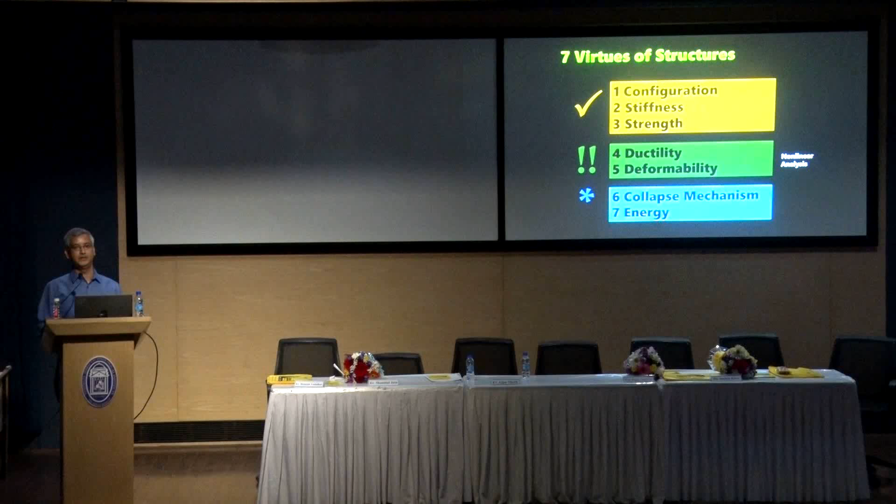But to say that yes, this structure is able to achieve that goal of strong column, weak beam, is the collapse mechanism that we assess the structure with, doing some kind of analysis. The next stage would be to see what is the energy dissipation capacity of the structure, so this serves that purpose.

So when we have earthquakes, we have column structure and we have wall structure. We know, through experience, through analysis, through a lot of design that people have done, that walls are able to sustain larger deformation. Columns will be able to take higher load, but walls will be able to take higher load as well as a lot of deformation capacity.

That's why we are trying to push, or the earthquake codes that are coming in the country now are trying to push towards wall construction rather than just moment resisting frame with columns and beams, particularly to achieve the deformation capacity which will be based on the ductility that we achieve in the structure.

So the minimum requirements are lateral stiffness, overall strength, and deformability. These are the 3 things that we need to do, and we are currently trying to do that. If we design as per the code, we think that we'll be able to achieve all these 3 aspects required by the code.

So with this background of earthquake behavior, analysis and design, we see what is required for earthquake safety assessment. To retrofit a structure, we need to first understand what the structure is capable of: do the assessment, some analysis, some preliminary design, and look at the configuration of the structure. Putting all that together, we come up with a plan of whether the structure is okay or not. If not okay, what is the next step to be done?

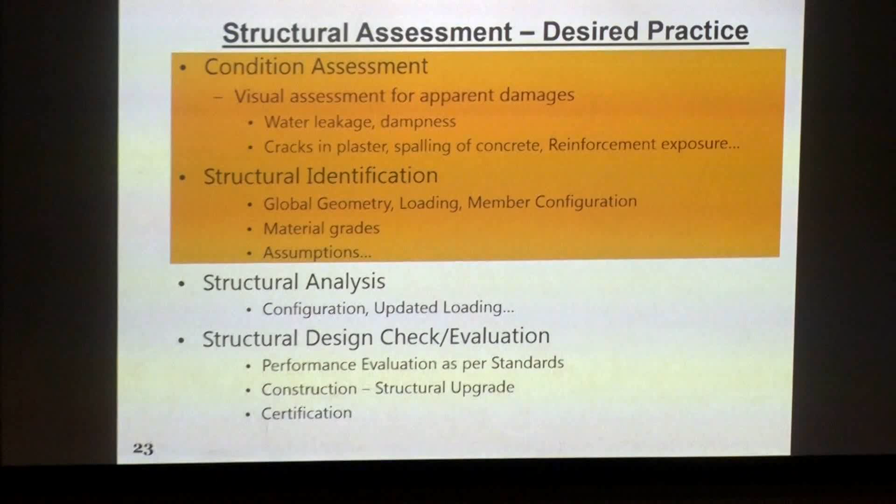A similar thing is expected here, where we do the structural analysis, structural design, structural construction, and certify that it is okay for occupation now. So that is what the desired practice should be.

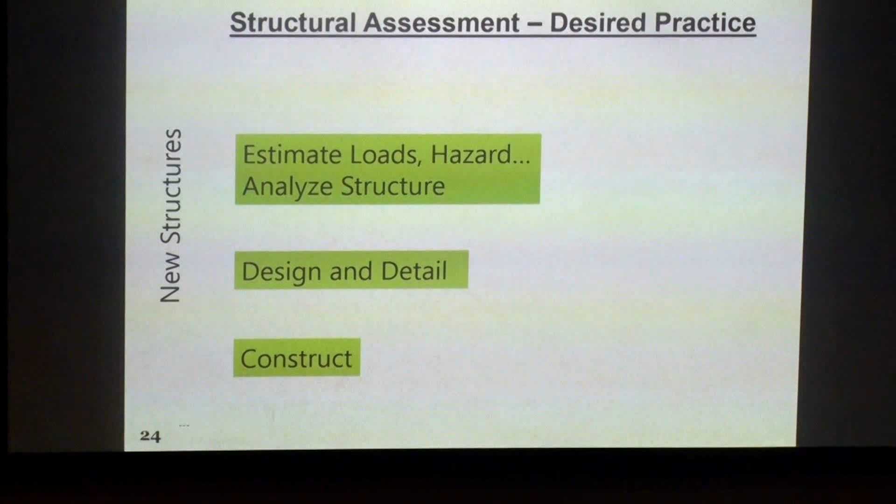So when you look at new structures, you estimate the load, analyze the structure, design in detail, and then construct. It's a top-down process, a simple process. We make all the assumptions, implement them, and achieve the structure we want.

But if you look at existing structures, we have to assess it first. We have to understand the existing condition of the structure, its existing configuration, and its capability. That comes as assessment, and then combined with analysis, we go back and evaluate for adequacy.

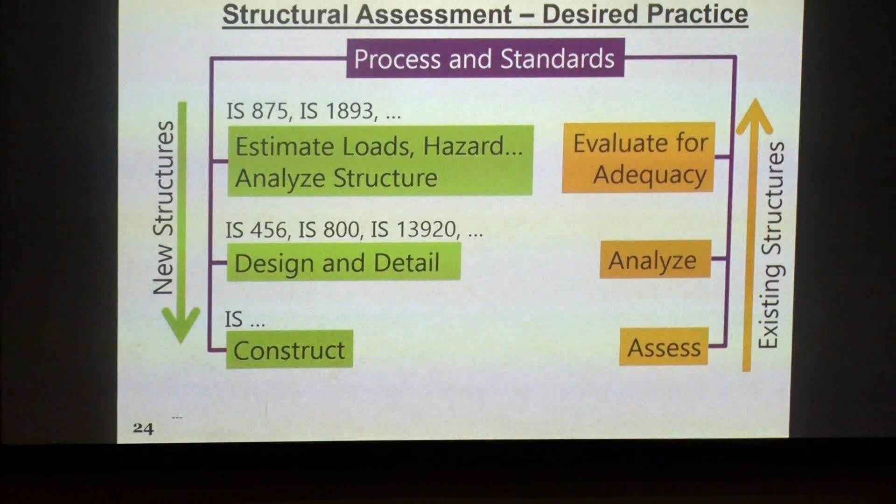We do assessment, analysis, and design, and then we evaluate whether this is adequate as per the relevant standards. That is the reverse process, where you are already given a structure and you say whether it's okay or not, and then do some kind of intervention.

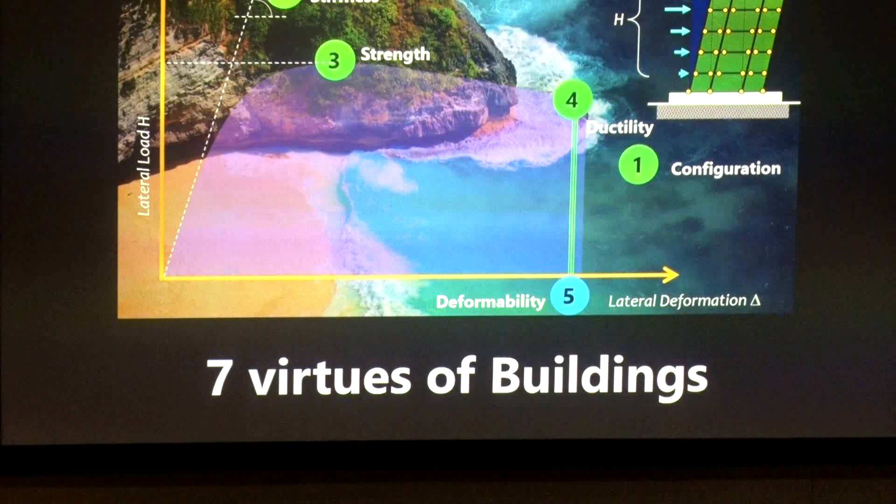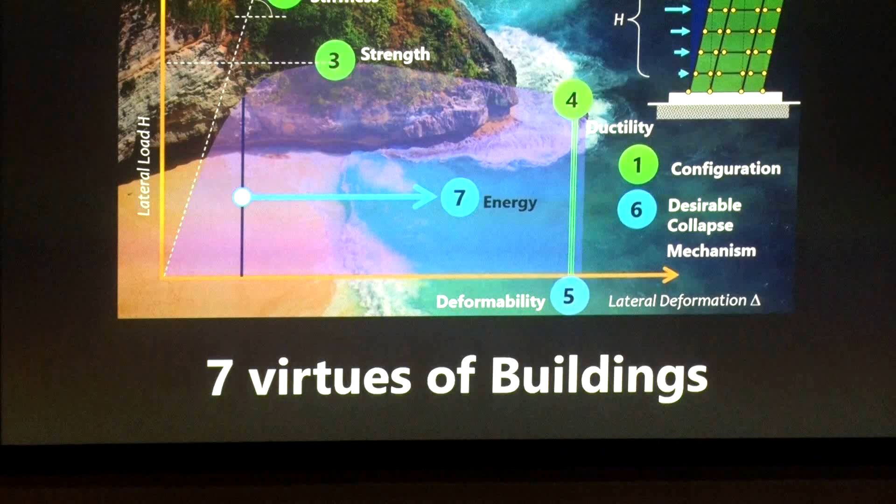Just revising this: configuration, stiffness, minimum strength, ductility which comes along with deformability, desired collapse mechanism, and energy. This was shown earlier in the morning also. I want to go through this again, because if you understand this, it will be easier to conceptualize and imagine a structure having all these features, or whether the structure has only a few of them, and how to bring these features to the structure would be easier for the structural engineer.

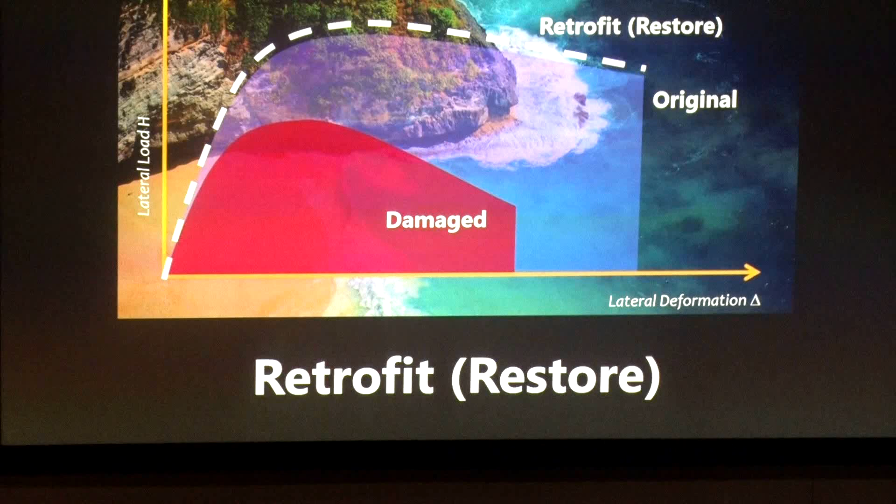But there's one small change I would like to state. We have to see how to come to that. The original structure was designed about 50-60 years ago, at that point under whatever standards existed. Now the standards have changed substantially. Whether we bring the new standards into the picture or not is the question we need to collectively answer.

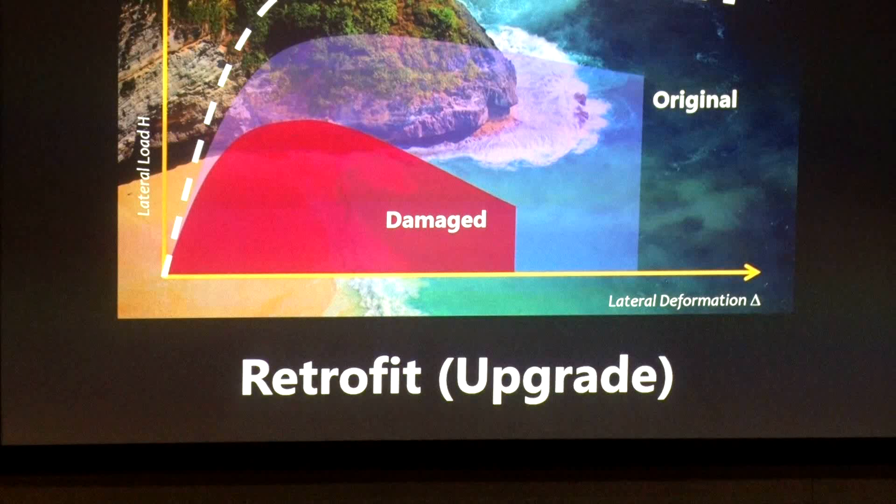Then there is remodeling: original structure, damaged structure, and the remodel will be somewhere in between. We make some changes, and based on our understanding of the behavior of the structure and the loading, we say that a slight increase we may be able to achieve.

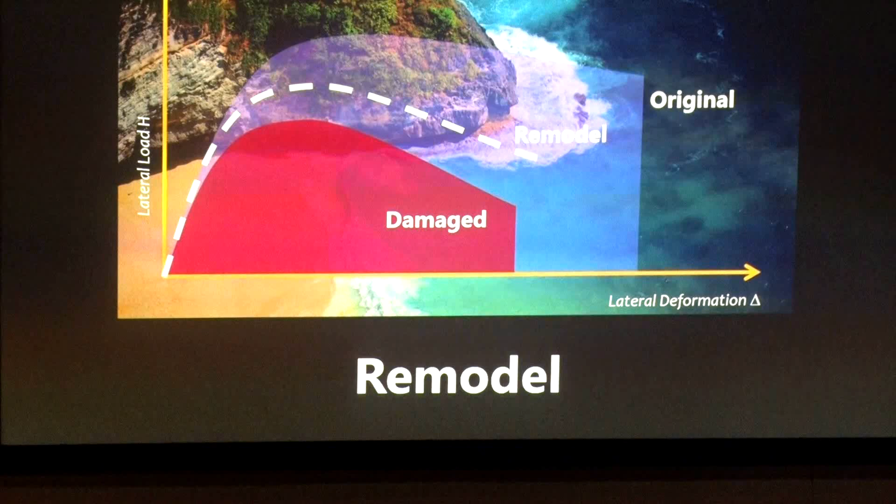We look at repair. In repair, we are actually going back to its original configuration. You achieve the damage stage - if you just take out plaster, take out cover concrete, and replace it with mortar or micro concrete, you're not going to add any value to it. You're just going to restore its damaged state. Visually you will say this is looking good, the beam is good, but you have not done the due diligence of assessing and checking whether the structure is capable of taking the expected loads or not.

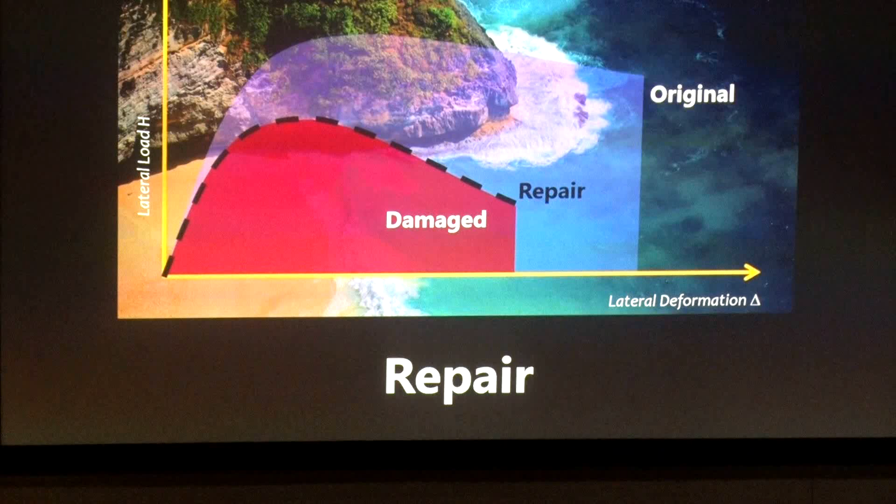So if you look at all three together - retrofit upgrade, retrofit restore, remodel, and repair - these are the levels we will achieve in terms of how the structure is going to serve us for its remaining life.

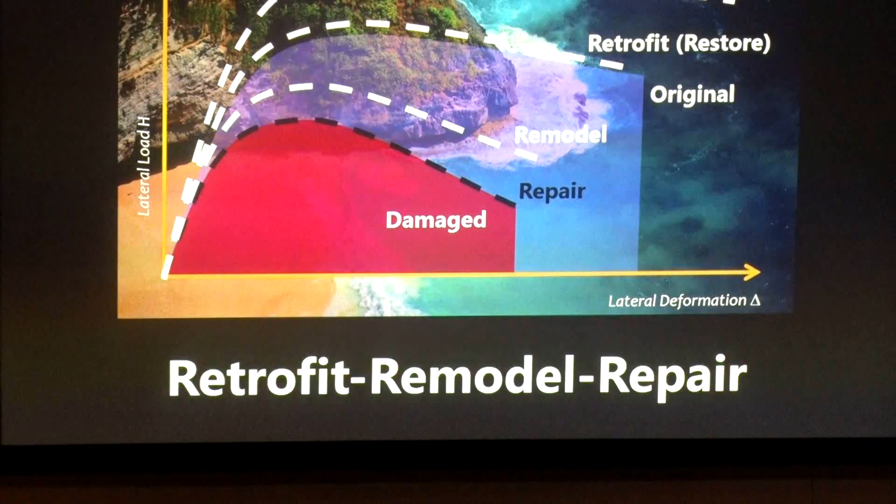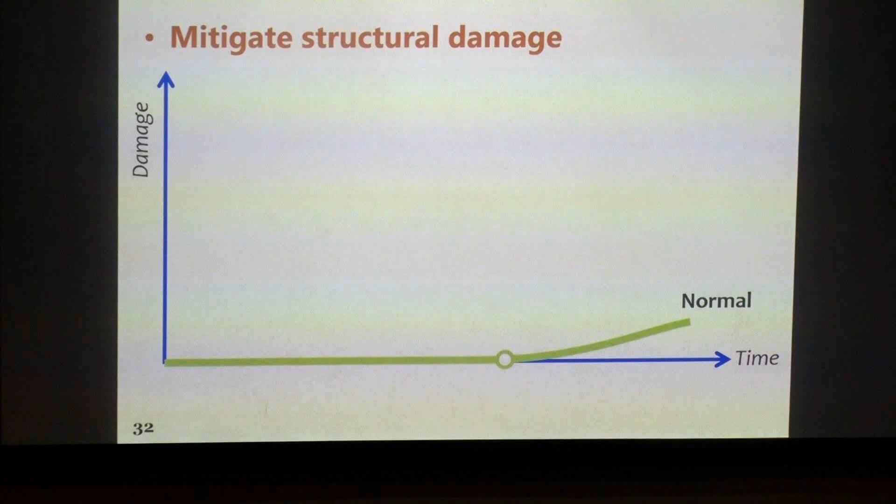So when we look at another pictorial, we're trying to put in different ways of understanding what this process of assessing and retrofit entails. This is the normal life of the structure, and if there are deteriorating characteristics imposed on the structure - sulfate attack, carbonation of concrete, some damage, bad use, leakage, corrosion - all those affect the behavior of the structure.

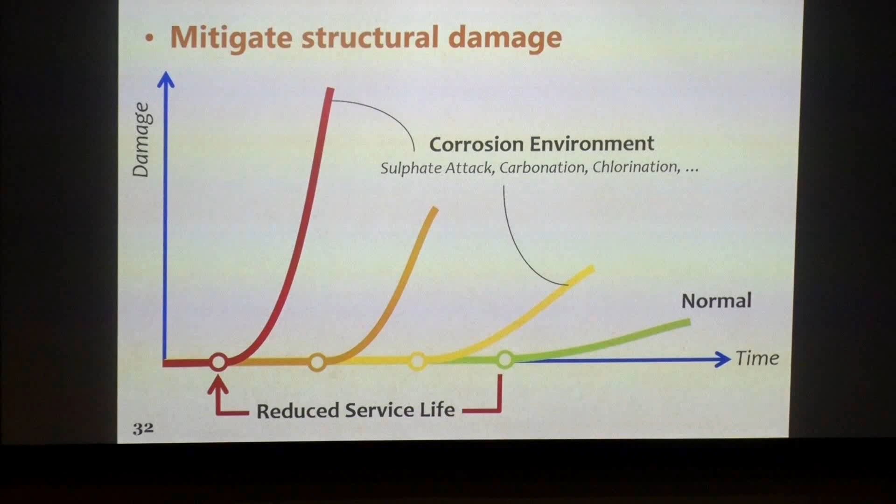So if you look at the behavior of the structure, its capacity degrades over time. If at some point in time you decide to do a restoration, retrofit, or upgrade, and you do it earlier, you may be able to extend the life of the structure by a little bit.

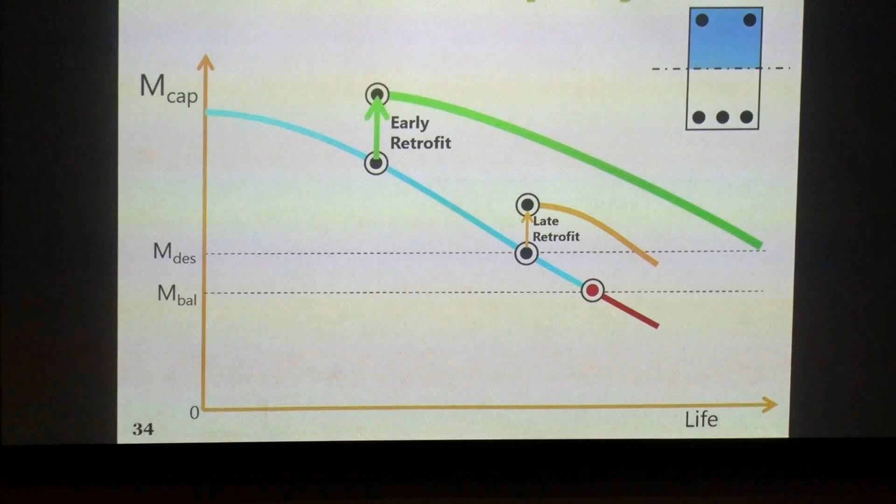If you do a late retrofit, because the structure has degraded so much, getting in all those features compounded with the new standards, we may not be able to achieve the same extension in the life of the structure. It's not that we will not be able to achieve it, but the difficulty level will be higher - the effort and money we have to spend would be much larger when we do a late retrofit.

If you do an intervention, a repair or retrofit at some point in time, you increase the life of the structure, and it is brought back to a good state where it can take sustained loads. But at a certain time, when the structure is highly degraded, going in for retrofit becomes more and more difficult.

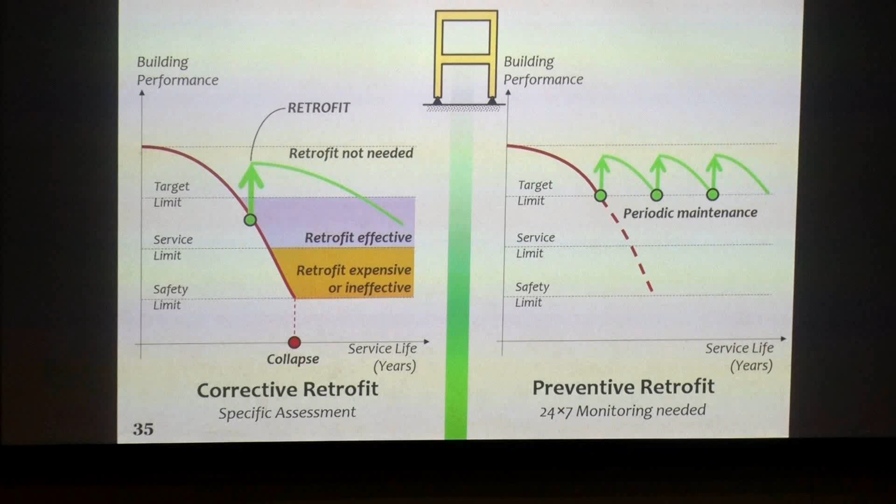Another pictorial shows how the structure behaves. If you go in for repair, you are just restoring the structure to its current level. There is no added value in terms of behavior or capacity of the structure, so there's no improvement. In case of the design load, the structure will not be able to perform the way it is supposed to.

So again, structural repair is not structural retrofit. We have to come out of the notion that just doing some kind of restoration repair amounts to a retrofit of the structure.

Right now we don't have a compiled document or guidance which tells us how to do this. The effort of BIS CED 39 is to create a document that will guide us in taking this forward, whether we are looking at restoration, upgrade, remodeling, or retrofit.

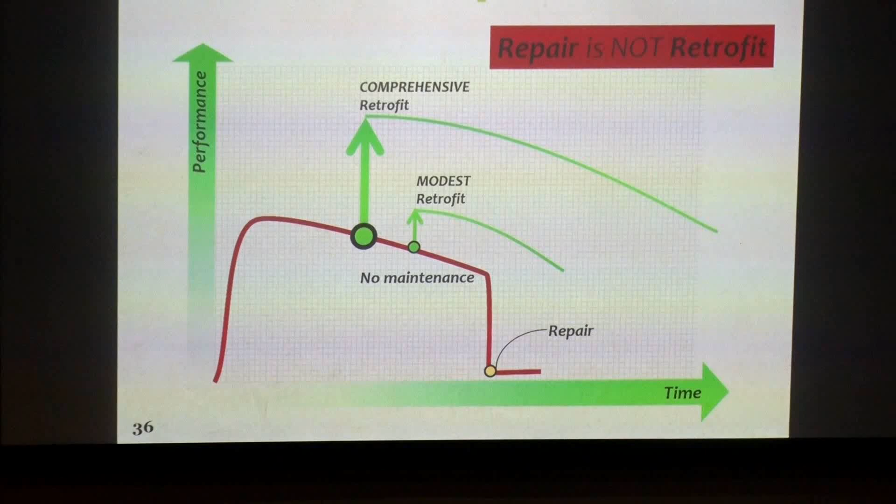Why are we doing this? Because there is some deficiency that was there originally in the structure, or something has happened where the structural capacity is degraded. Either it is environmental conditions, or change in codal provisions, or insufficient load combinations considered.

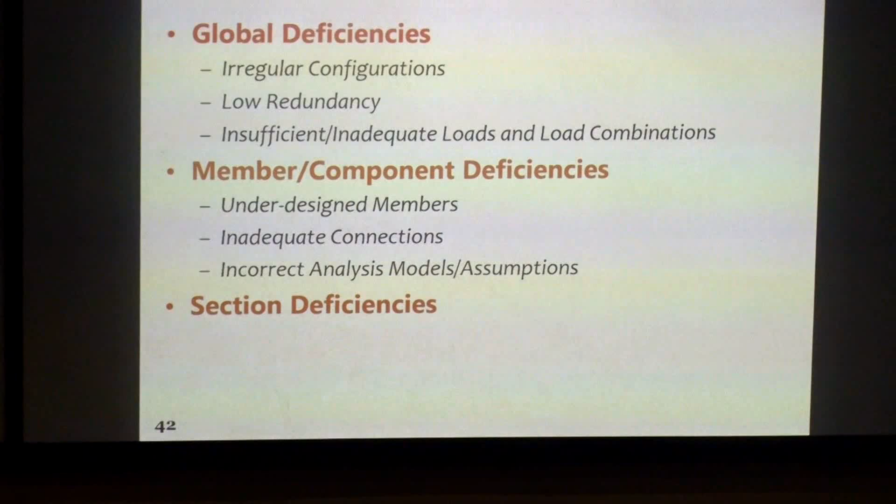So you would have under-designed the beam, or have bad connections that are not properly designed. Strong column, weak beam has not been followed, because of the way the structure behaves during earthquake shaking.

Then we have the effects of the re-entrant corner, which is very well captured in the literature on concepts of earthquake resistant behavior of buildings, a book written by C.V.R. Murty and Rupen Goswami. They have covered various configurations we should look out for, with pictorial representations of what happens with this type of structure, where because of this type of deformation, there's stress concentration at the joints or re-entrant corners.

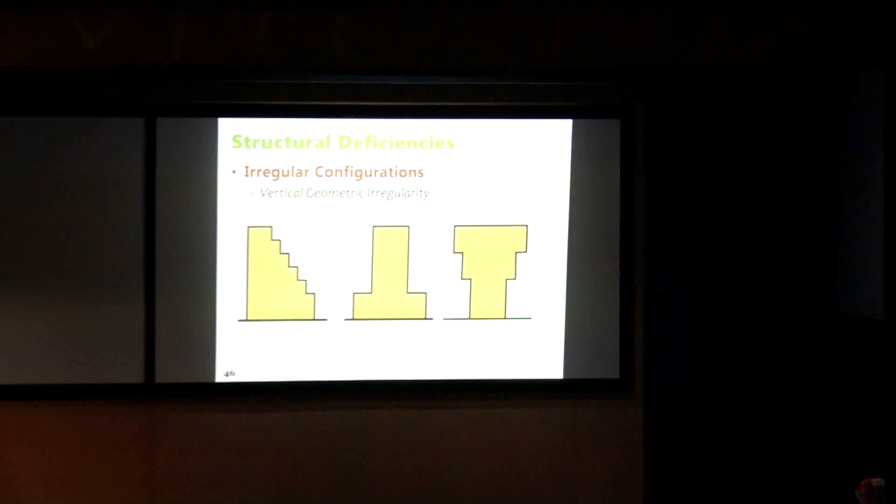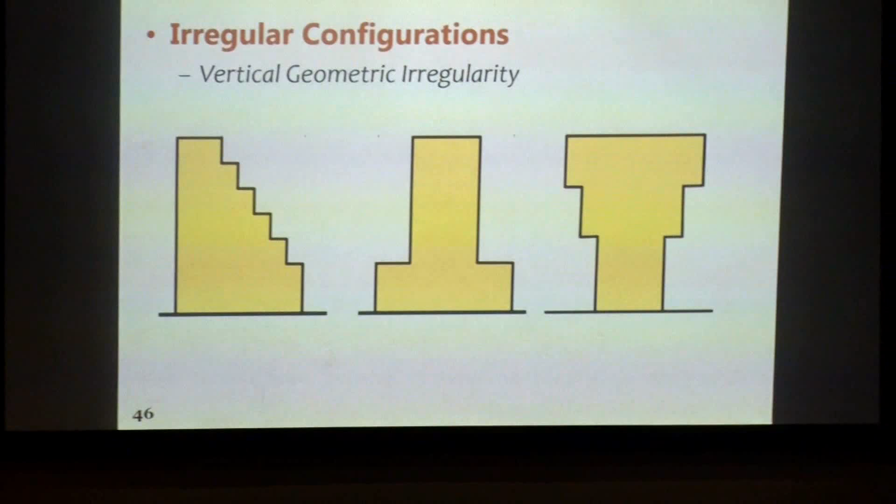Then we have irregular geometries. This is again covered in the code, and what is to be done is also given in the current draft of the code. The earlier code was talking about it very subtly, but the revised code coming out is explicitly talking about how to take care of this and how to avoid it, and at what level you have to say this is not allowed, this is prohibited.

So these are the problem points in these types of buildings. At the re-entrant corner, wherever there is a change in geometry, is basically the problem. So it's very layman type of terms, if you use them.

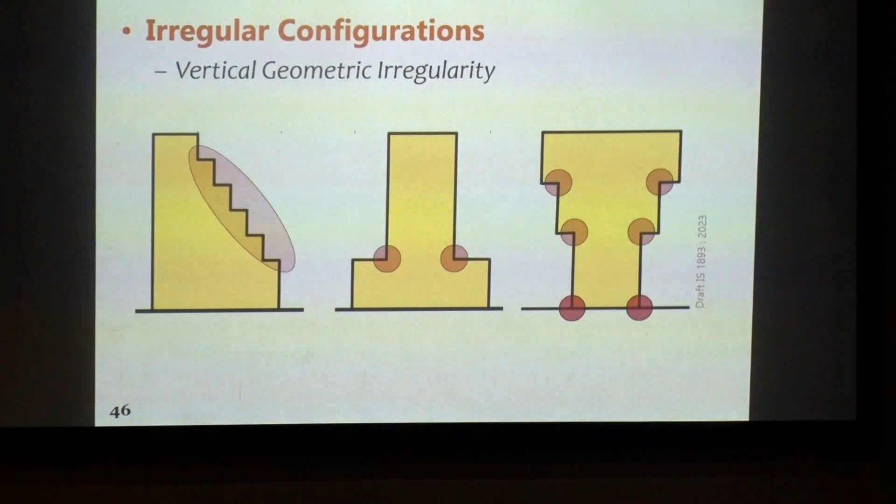Wherever there's a change in geometry or shape, you would have a problem with the re-entrant corner. This is a famous building in Bombay, the typewriter building, which is basically the stepped building that the code talks about. Another building is basically the inverted building, with 3 by 3, 9 columns at the base, and cantilevers coming out by about 7 meters. This is a typical case covered in our code.

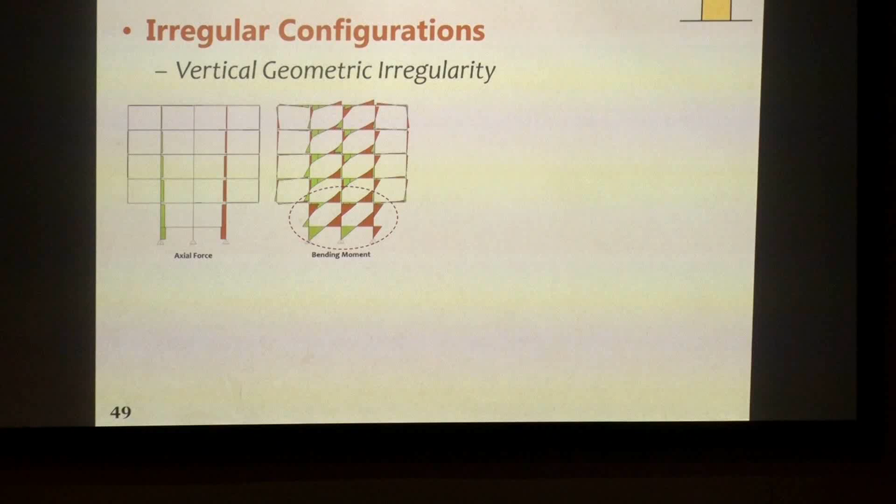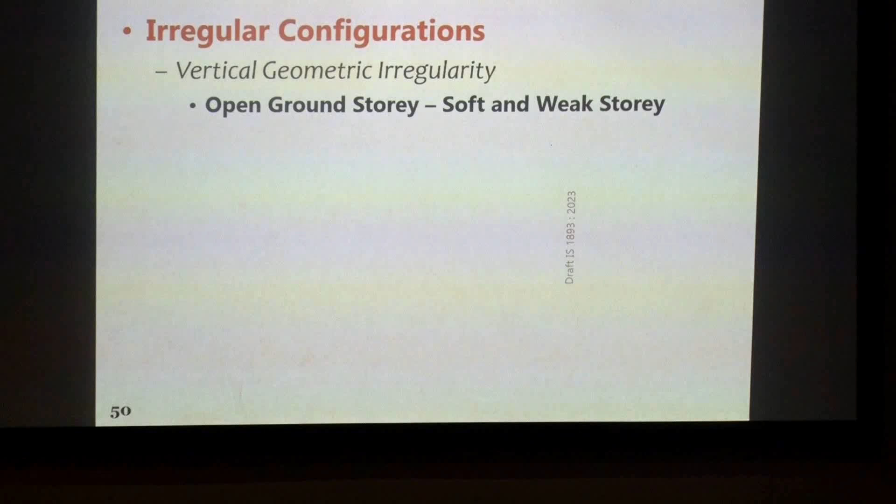So we have these irregularities. What happens when we have such a configuration, and what would be the condition of the structure if a design level earthquake strikes? This is explained in a book that is freely available on the internet. You should go through it, as it gives a lot of insight into the behavior and how to avoid such issues.

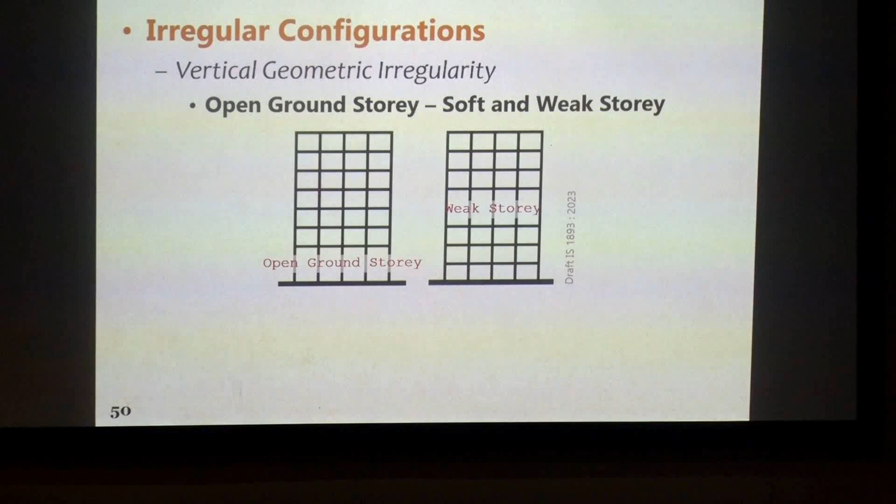Then we have open ground story, which is a traditional problem building for us across the country. We have seen this in many earthquakes, whether it's Bhuj, Chamoli, Jabalpur, or even before that in Killari. Some cases of open ground story or weak story were noticed, and we have been struggling with this problem, how to avoid it and how to make our buildings safe when these conditions exist.

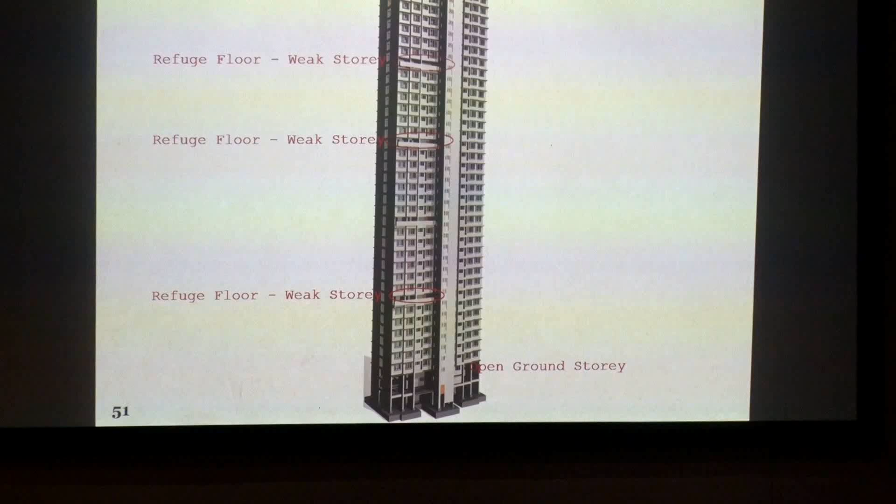In tall structures, you would have service stories, which may be a problem of weak story or open story. How to deal with them is something most structural engineers struggle with. Then we have open ground story, weak stories, and stories with infills or without infills, weak and open. These are the configurations now covered in the code.

Weak and flexible story, and reduced column sizes. It's a very common practice that as we go higher up, the load reduces, so we reduce the column size. It's a natural thing for an engineer to do, but we have to ensure drastic changes are not happening in those structures.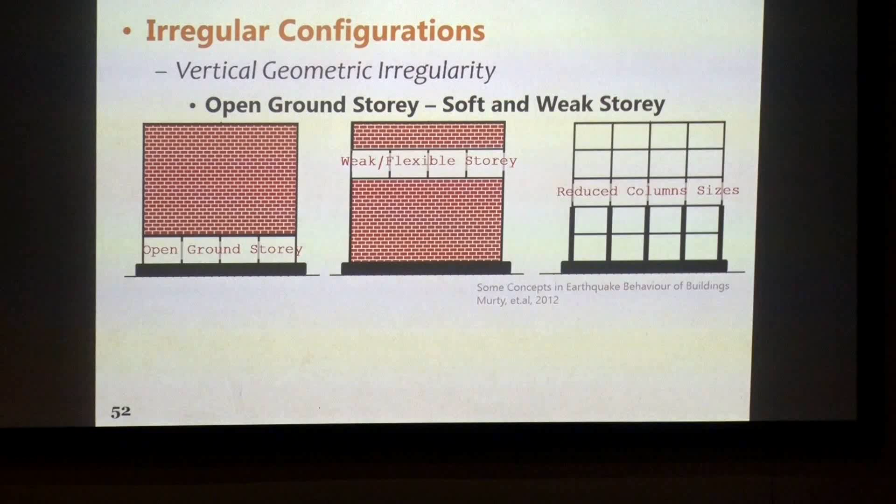This is a typical example of open ground story, because if you want to park a car, this is all parking area, and that is how the open ground story comes into the picture.

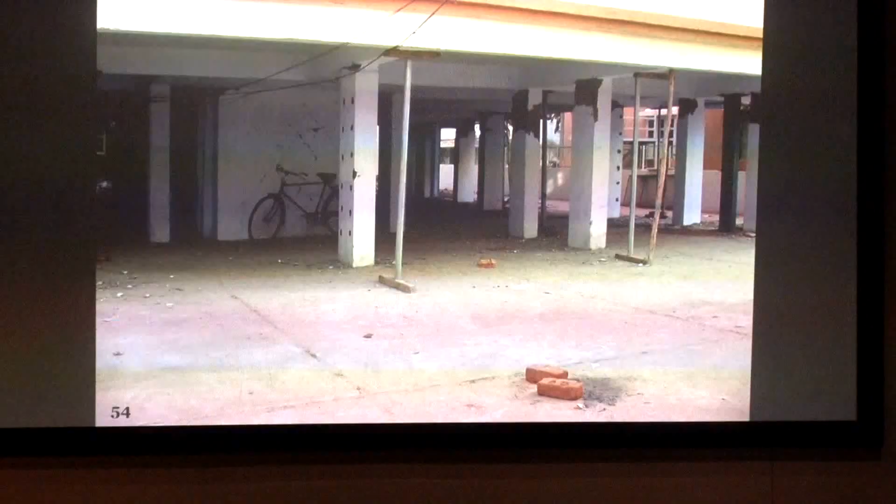This is a picture from the Jabalpur earthquake, where we noticed this for the first time. First time in India, a building with an open ground story was subject to an earthquake, and we were able to look at it and understand the behavior. Theoretical knowledge existed in India before that, but we looked at this and came up with strategies of avoiding it, or doing an intervention which would reduce the effects of open ground story.

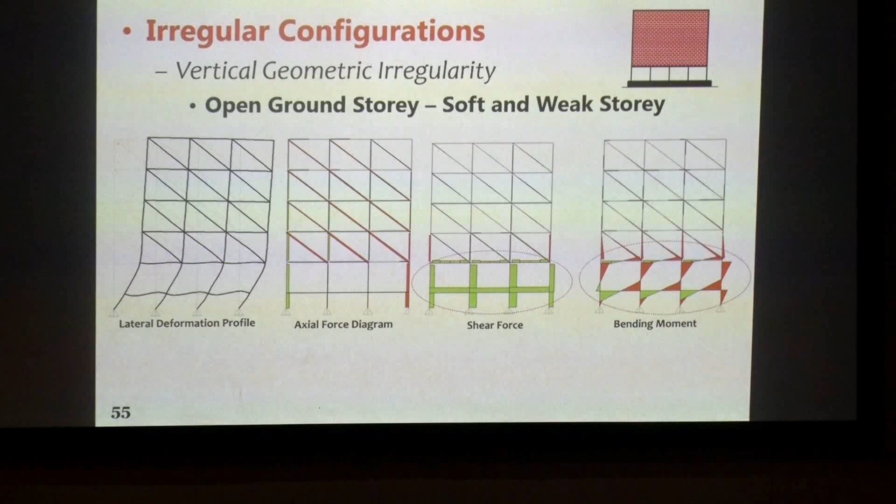So again, structural deficiencies, open ground story. The book I talked about explains the effects, and pictorially tries to show what will happen if this is the condition you have. Later in the book they also try to explain the methods you should use. This is a weak story at the upper level.

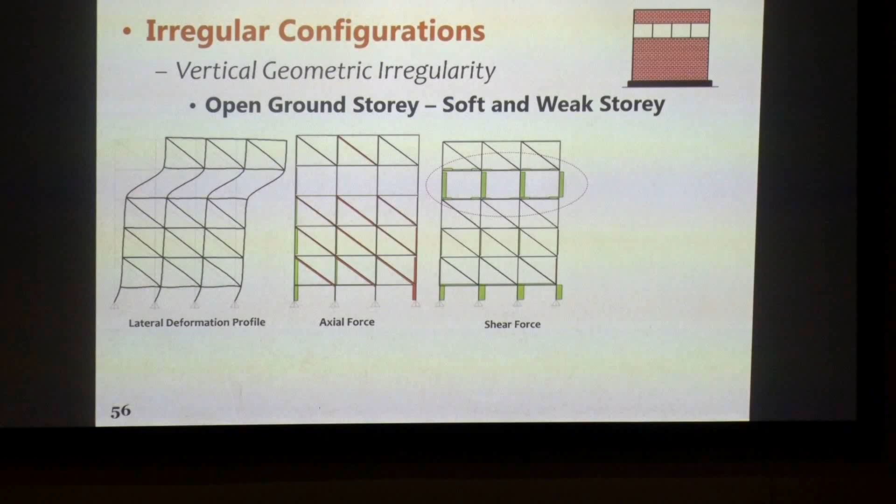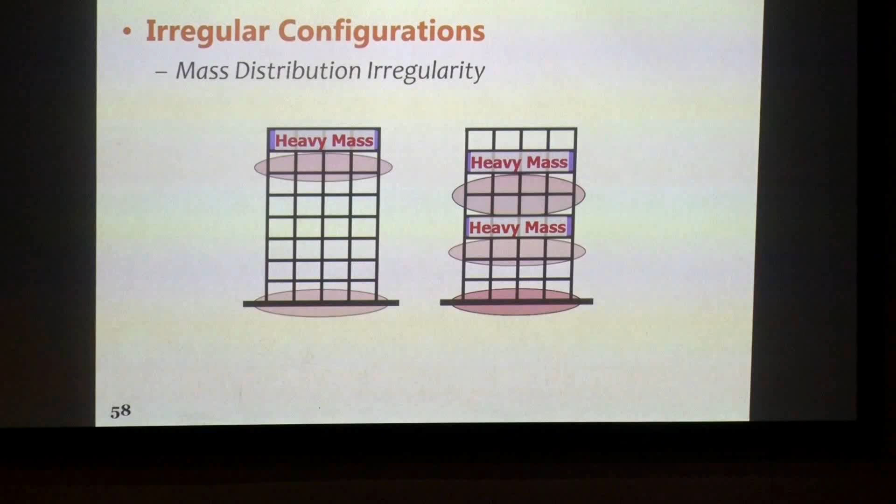Irregular mass distribution, with heavy mass at different levels, is possible in many buildings where you have a service floor with larger weight or mass. This will be a problem point in the building. Then we have irregular plan configuration and irregular mass distribution. This is just the tip of the iceberg of the problems that can happen. Now, having this knowledge, these are the problems we have to deal with.

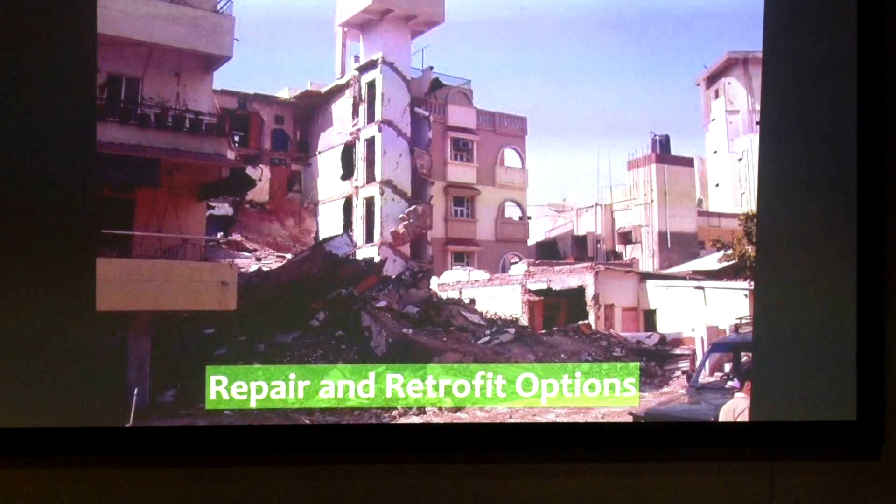Based on that, we go into the next step of identifying, and once we know the problems, we would be able to spot and pinpoint them and say, okay, this is the problem, this is the solution that I want. So what are the options available for retrofitting a building, or improving, upgrading, remodeling, all those four terms that we use?

Basically, member retrofitting, where we do jacketing, wrapping, column jacketing, beam jacketing. Then we have structural retrofitting, where we add structural components like columns, beams, walls, into the existing structure. And there's material level retrofitting, where we add some material into the beam and strengthen it, like epoxy injection, which is a very common solution used everywhere, where you pump in an epoxy compound to increase the strength.

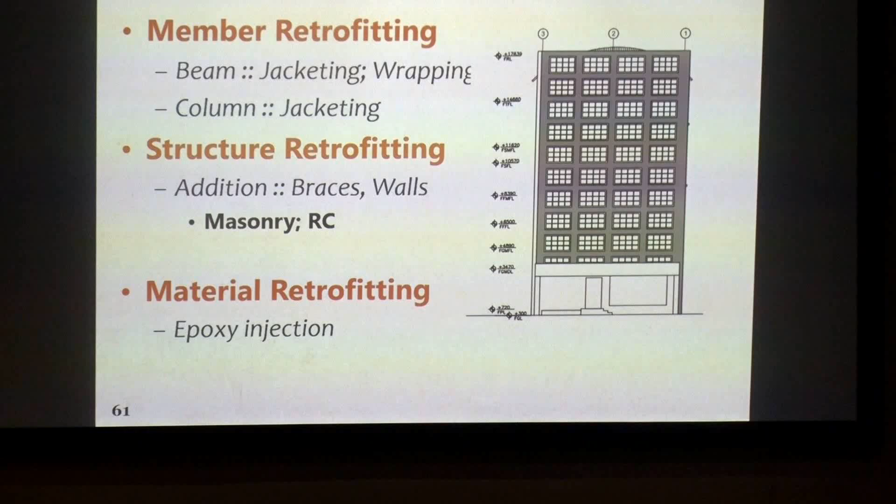This is a common approach where we do jacketing of the column: remove the cover, put additional reinforcement, and reconcrete it.

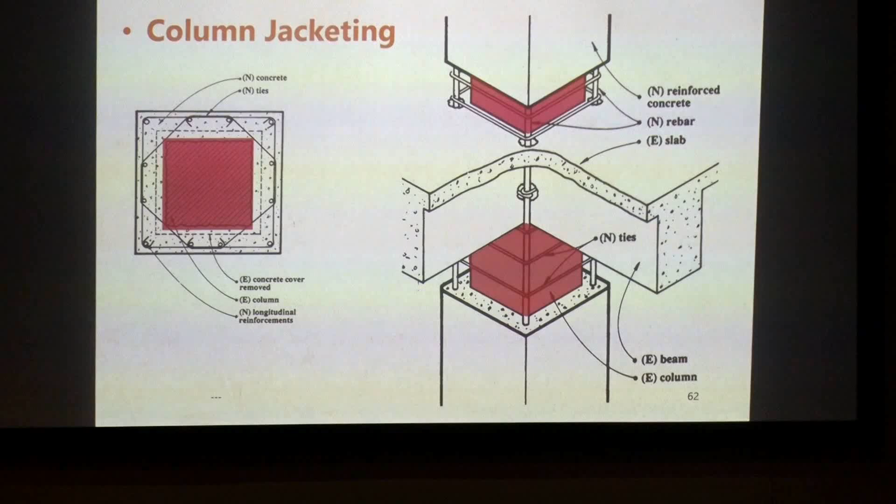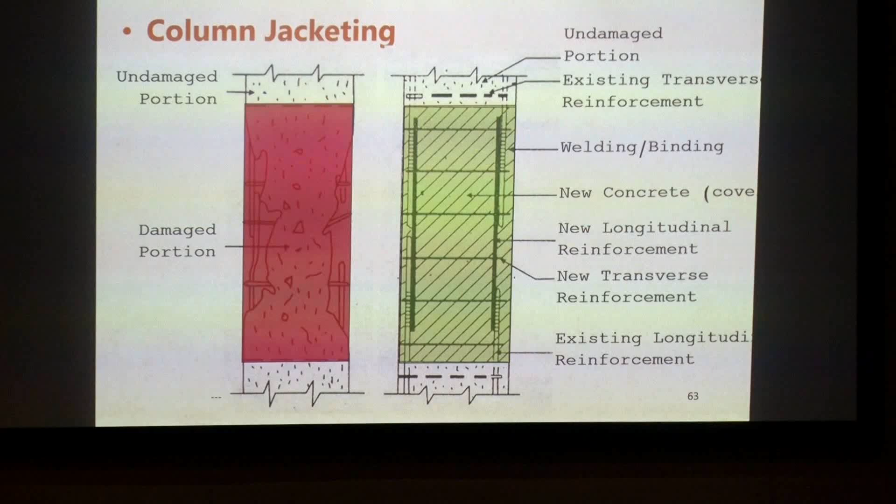This red is the original column, and the one outside is the new jacket that has been added, increasing the size of the column. When there is a damaged portion, you can add reinforcement to the column and do a jacketing. These are traditional standard methods being practiced across the country, where increase in size of the member and increase in strength of the member is possible.

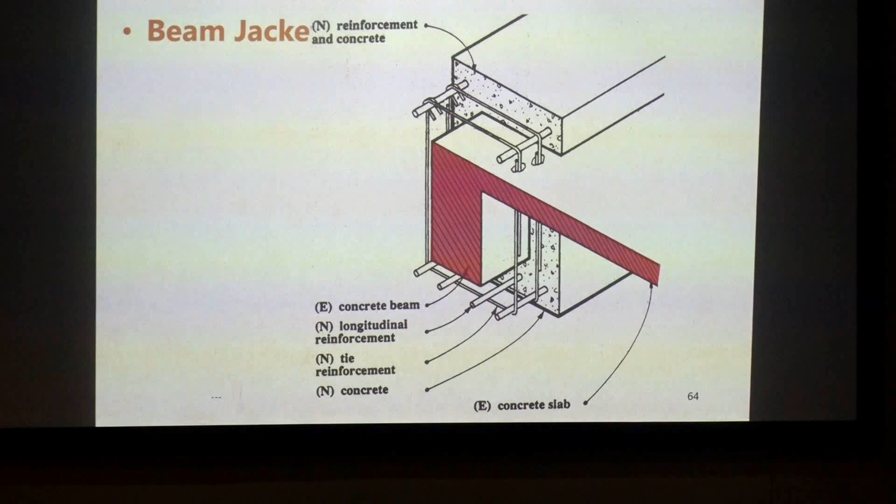Here also, existing beam and slab with existing reinforcement of the column and beam is not shown. When you add a jacket around it, you can do it like this. It's a very tedious and involved process, takes a lot of time, and how to assess this, how to do an analysis of this is also a question. We don't fully understand how to do this, but for such a large stock of buildings which are inadequate right now, these are the methods available to us.

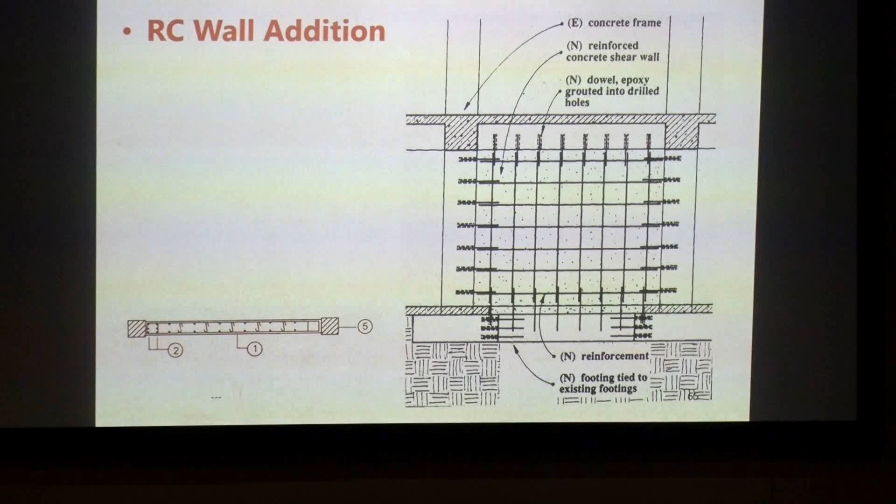Then there is addition of new RC wall. We have to connect the walls with the members of the building, maybe the column, foundation, create new foundation, connect it with the beam. This is the existing structure, and this is the new structure that is added to take care of the lateral load that is going to be subjected to.

Then there is a method of adding masonry walls also, which was practiced by many people. It was recommended also, just go and add brick masonry walls into all the open ground, immediately after the Bhuj earthquake. It is believed that this saved a few collapses of the building in the aftermath of the earthquake and the aftershocks.

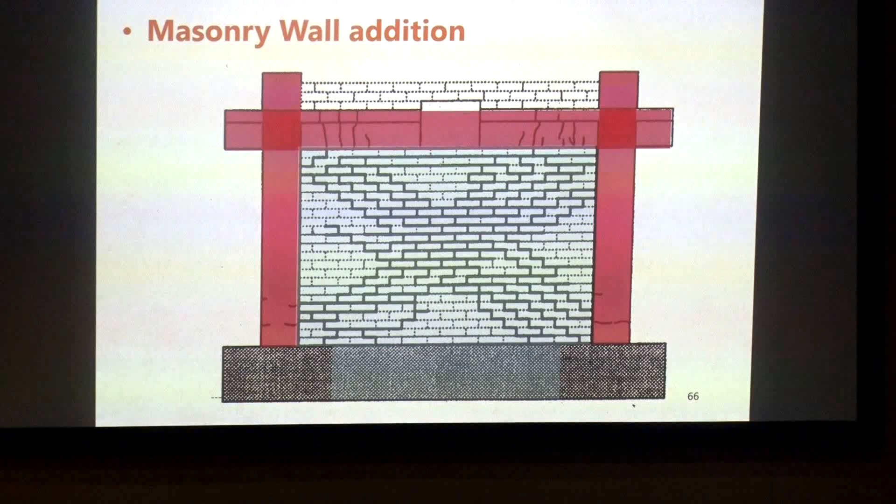Original structure, and then you add infill walls, which basically adds a little bit of strength and stiffness to the structure. Then this is very rarely practiced, where you add an additional component or member outside the building.

This is an existing building, you add a buttress wall outside the building. May not be very easily possible, but it's another method where you have space and the luxury of encroaching away from the building. This could be another method where we can add lateral stiffness and strength to the building.

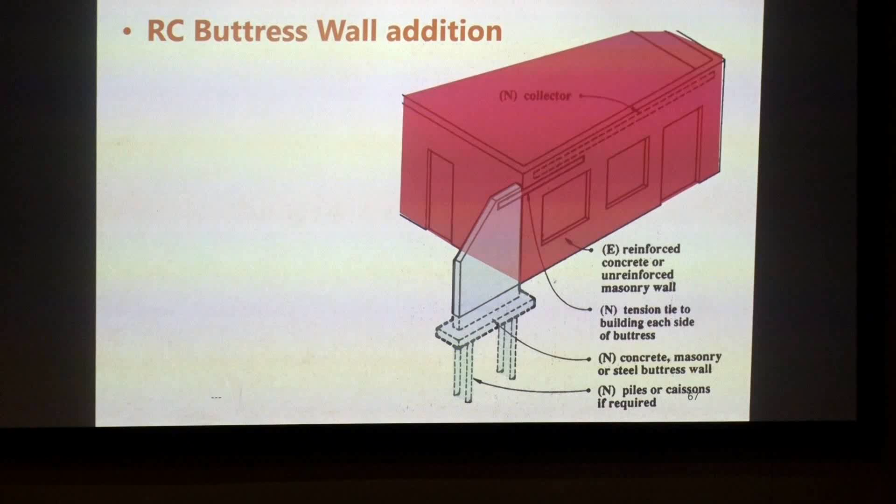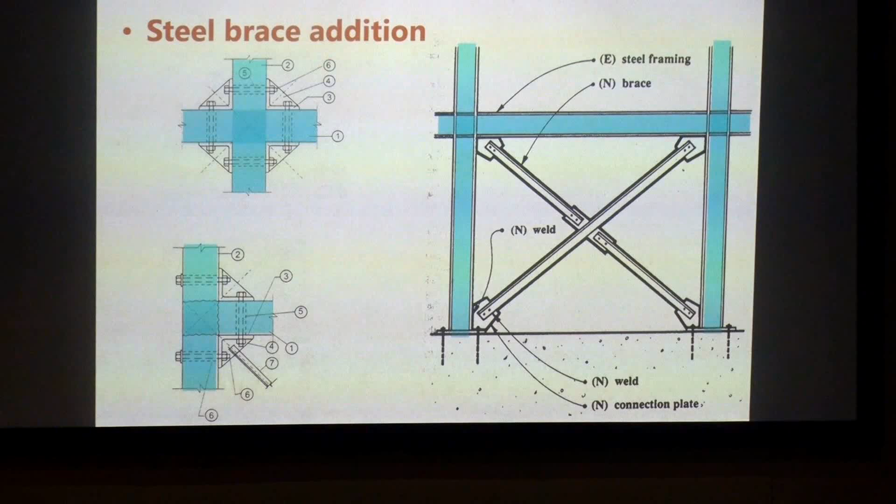Then this is commonly practiced across the world. In India, few people are practicing this, where you add a cross brace in steel between the joints of the building, the panel of the building. This has a similar effect as the infill walls or the RC walls, but in terms of retrofitting, this is one of the repair techniques that is available.

Then another practice that people have is wrapping carbon fiber around a column or a beam to increase the confinement, and that is able to increase the compression capacity of a member.

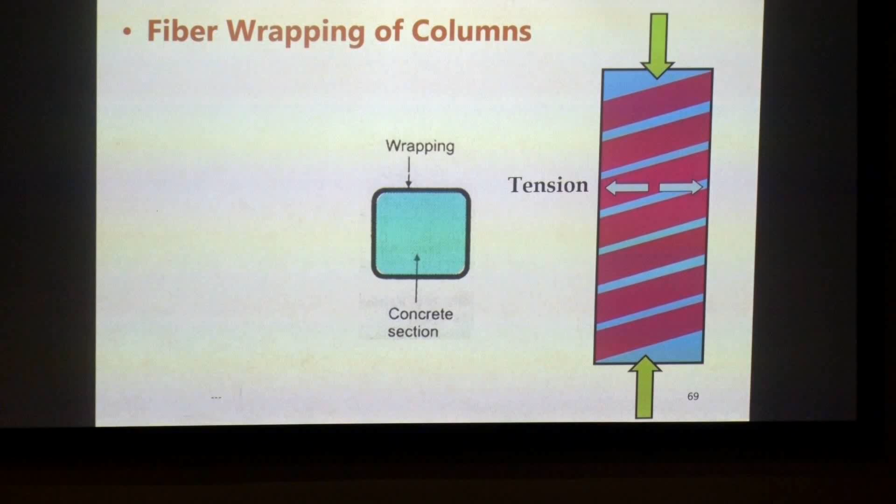So these are traditional methods, there may be many more which I have not covered. Many engineers do different things and are able to come up with new methods which may not have been covered here. So we're looking at the pre-draft of 13935, the third vertical column of the harmonization of the code, where we look at how to assess, repair and strengthen buildings.

This is a sample, not in the public domain right now. We are still discussing this. Right now we have made a draft of part 1, which is general provision for all structures. Like 13920 and like 1893, we will have different parts for different types of buildings, like masonry buildings, RCC buildings, steel buildings, and all the other buildings that will come.

Maybe bridges will also be covered in this. So looking at earthquake assessment of the structure, we have two types of assessment: pre-earthquake, where no earthquake has happened, and post-earthquake, done after the earthquake. Some of us would be able to visit earthquake damaged sites, but most of us will not get an opportunity to go into an earthquake damaged site.

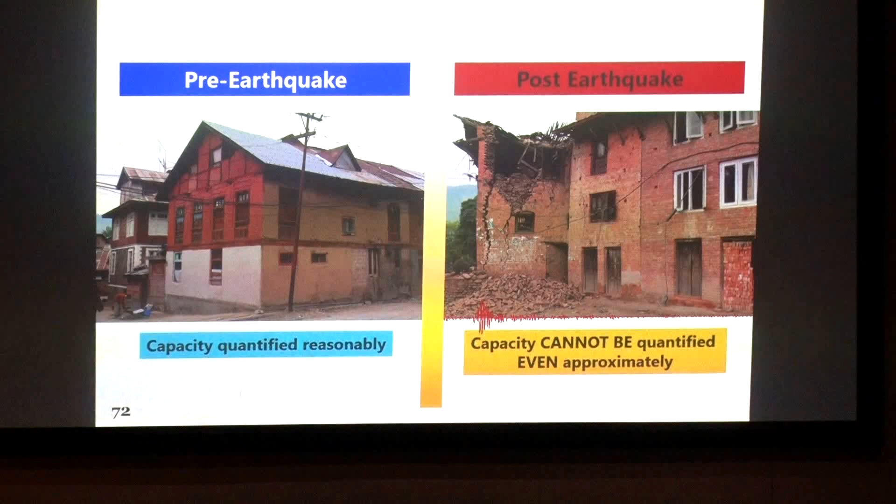But pre-earthquake, what is to be done? Again, look at all the configurations of the building which are bad, which are good, and based on that try to assess whether the structure is good or not, and decide what kind of intervention and strengthening is required for that type of structure. So this pre-draft is talking about 5 levels of assessment.

The first one is rapid, quickly, within maybe 10, 20 minutes, half an hour, look at the structure from inside, outside, whatever is possible, and say whether there are major deficiencies in the structure, whether there's an open ground story, whether the columns are too small, whether it is sitting on a slope, whether it is on a sandy strata where liquefaction is likely. So these global features we identify in the structure and list down the problems.

This is a rapid qualitative assessment, similar to what you must have heard as rapid visual survey, where you cover about 10-15 buildings in a day. A group of 2-3 engineers and technicians go and look at it and identify the buildings and list the problems with the building.

The second is detailed qualitative assessment, where you put numbers to each of the deficiencies, which are a little more involved, but you need more experienced people. Put numbers to each one of them and then rank them.

Then these are qualitative. The next three are quantitative, where you do preliminary quantitative assessment, where you see overall what the structural safety margin is, whether the base shear is okay or not, and whether for the vertical loads coming on the building, the columns, walls, whatever structural system is available, is adequate or not.

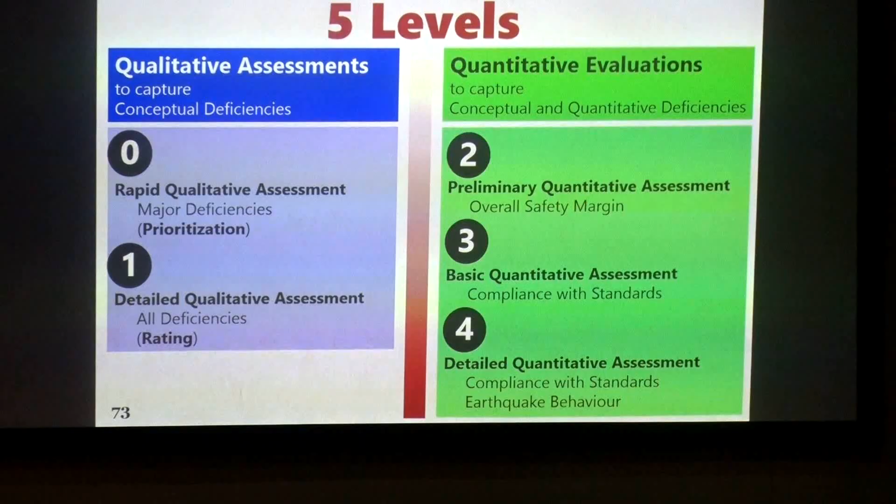So these are the 5 levels that we are proposing in the code right now. The 5 levels are: rapid assessment, detailed assessment, preliminary assessment - these are rapid in 2 parts, 0 and 1 - then preliminary quantitative assessment, basic assessment, and detailed assessment, with slightly higher level of effort for each of the levels.

So this is qualitative, this is quantitative. These are quick methods, while this will require a little bit more analysis and design experience to do it.

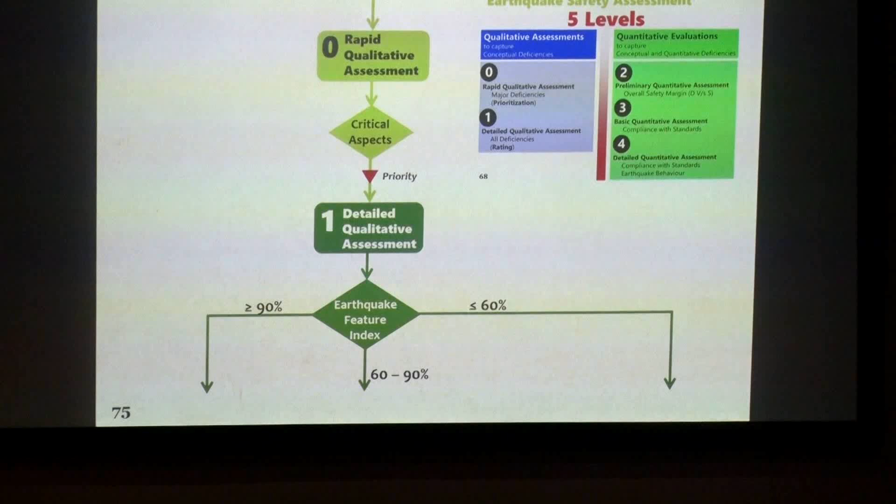So we've tried to put this in the form of a flow chart. You do a level 0 rapid qualitative assessment, check the critical aspects, and prioritize the buildings. Suppose you have 200 buildings - in that, let's say this year I want to do 20 buildings. Based on the rank you get from the rapid assessment, take up the first 20 buildings and go to the next step.

Then do the detailed qualitative assessment of those buildings, and come back for the next 20 buildings the next year, because the rank of the remaining buildings indicates lower risk. You take the first set first and start doing the work.

So in detailed qualitative assessment, check all the earthquake features, assign numbers to them, and say - let me go to the next slide - when you assign the numbers, if it's more than 90, it's a good structure.

Then you come to this step, preliminary quantitative assessment, and do the overall check. If it is satisfied, nothing has to be done, the structure is okay. If it is not, then you go to the codal provisions, and if that's satisfied, come back and stop. If it is between 60 and 90%, something is wrong with the building.

Do basic evaluation of the structure, the third level evaluation. Check with the code - if it is satisfied, then you can stop. If structures are not satisfied, then you go to the detailed evaluation, the third, fourth level of testing, for buildings that receive a score less than 60%.

That happens, and detailed qualitative assessment follows. For normal structures, there's one path given; for critical structures, there's another path, because the main code, IS 1893, does some kind of subdivision of the type of structure.

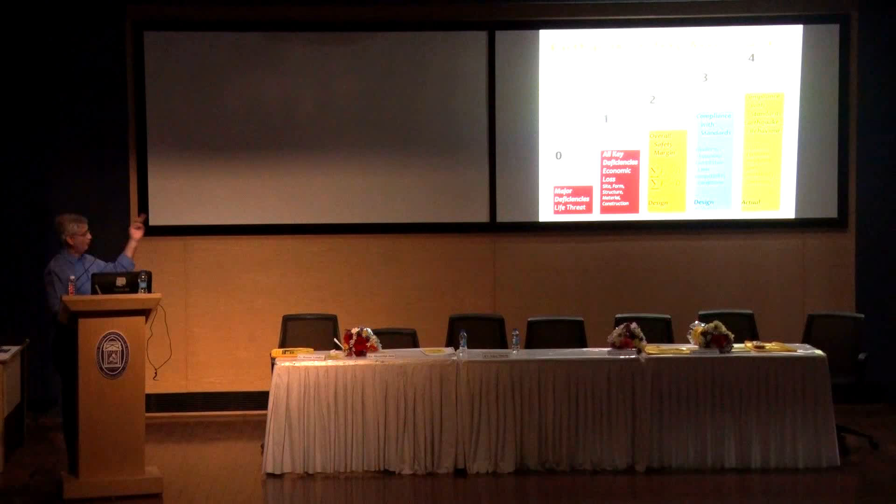Then preliminary quantitative assessment is a basic check on just lateral loads, whether VB in X direction or VB in Y direction is adequate or not. Based on the understanding of the structure, we can quickly calculate the base shear, then compare with the capacities identified from the standards, and check the design to see whether that satisfies. The third one is compliance with the standards.

Do a detailed analysis of the structure, check all the equilibrium equations, constitutive laws, and compatibility. Do the design based on that - as we spoke in the beginning of this presentation - where we make all our assumptions, collect all the documents, take leaps of faith, and say this is my structure, assume the reinforcement, all that. After doing all that, we come up with the understanding that the structure can be passed through this kind of assessment. And then the fourth level, or fifth level actually - 0 to 4 is the fifth level.

We see whether the compliance is there with the code, including the behavior of the structure. So this basically looks at the performance and how it will behave, and based on that actually do the assessment of the structure and qualify the structure.

So this in a nutshell is what the 13935 code is trying to achieve, and that is how the code is being drafted. So the outcomes are the answers to what is the structure's safety and where the deficiencies are - all the critical problems that can happen in the structure - compare them with each other and say whether this is a critical structure or not.

Even if the structure may not collapse, what level of damage would it sustain given a design level earthquake to occur? And the main assessment is whether the method is going to give you what you are trying to achieve.

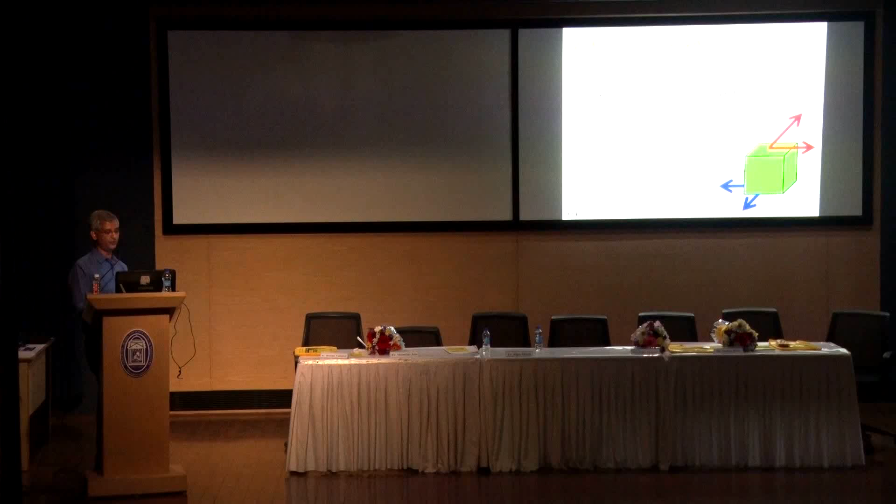Then we have preliminary quantitative assessment, where we check basic load configuration in X direction and Y direction, whether they are okay or not, and check the design. Some examples are given here - one is a bridge which can be quickly checked for earthquake load that will come on it, and whether the bridge is okay or not.

Some features that need to be connected - I'll skim through this. Basically, if there's a bridge, you check in both directions the forces that are coming and check whether the seating, bearing, and bolting connections for the bridge are okay or not. This is a picture from the Uttarkashi earthquake, where the bridge had collapsed and the abutment collapsed.

Another picture shows the shearing of the bearing - the bearing connected to the abutment, and the bridge actually sheared off. A closer picture shows that connections play a critical role in making structures safe. So in this example, look at bearings, look at bolting, look at seating, look at overall lateral capacities, and look at lateral restraints if there are any.

This is an example for the bridge that is created. Then we have basic evaluation. Again, 3 features we look at are stiffness, minimum stiffness configuration, and minimum strength. This is the code-level compliance we are looking at. Very basic, we do linear analysis, check it with the design codes, and check it with the load and design strengths of the codal provisions, and see whether the structure is okay or not. Based on that you decide yes or no, and then take the next step.